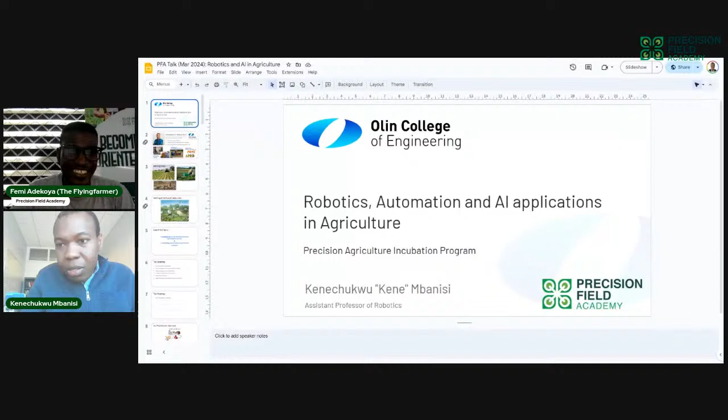It's a pleasure to be with you all. I cannot see who is engaging with this event today, but I guess at some point there might be some interaction. It's a pleasure to be invited to talk about robotics, automation, and AI in agriculture, and I'm very excited to be here. Thank you to Precision Field Academy for the invitation to be here, and to Mr. Femi as well. So I'll start with a brief intro about myself.

As was said in the citation, I am an assistant professor. I teach robotics, I do research in robotics in an engineering school in the US. A bit about my background: I grew up in Lagos, Nigeria. My undergraduate degree was in electrical engineering, and then I came to the US to do my graduate studies, both master's and PhD in robotics, and that has sort of shaped the direction of the work that I do since.

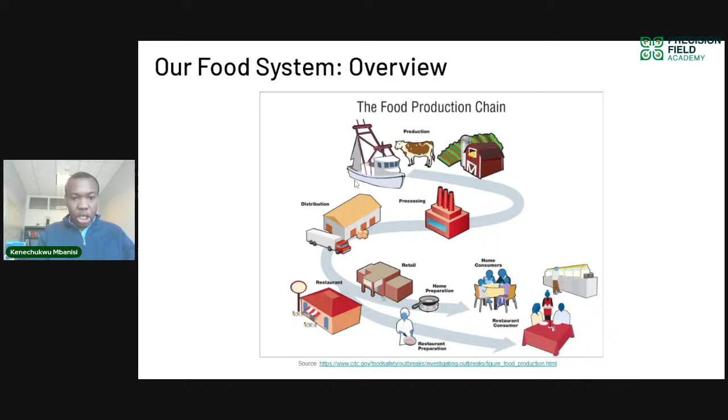All right, so we'll start with the first one, an overview of our food systems. This is a really good image that captures that. Hopefully this is not new to most people, but there are a couple of stages in our food system value chain. There's production, this could be livestock, fishing, or crops, and that is where food is generated. This is grown, harvested, caught, and then processed in some way. Different kinds of foods get processed in different ways. After processing, it is maybe potentially packaged into some form, and then it goes into distribution. Through distribution, it gets sold in a retail store, for example, that gets into your home. Hopefully most of you are eating today, so this is probably how the food came to you. Or you could go to a restaurant and have it prepared in a different approach. All right, so that's all interesting.

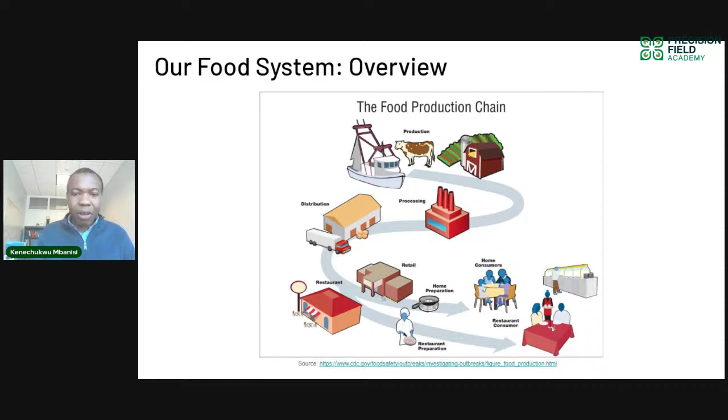I would like to make this more concrete with a personal example, an example of poundo yam and egusi soup, which is my favorite food personally. In particular, I'm using the Ayoola poundo yam example. We eat this food, I eat this food fairly regularly. Maybe some of you might be familiar with this kind of dish. How does this food get to our table?

So I can take this initial map and map it to this concrete example: food production. We grow yam, there's an example of a yam farm, and we harvest the yam, and then this yam is aggregated by different agricultural aggregators. This food is processed. In particular, for the Ayoola poundo yam, it needs to be processed, so it goes through multiple stages of processing, and then it is put through a distribution system. I'm in the US, so I buy this from a store that imported it from Nigeria. Then we buy it, take it home, do some preparation, make it, and then consume it. Hopefully this is not new to most of us, but it's important to keep in mind that this is the path from the farm to the table, and there are different ways that technology can impact that process. In particular, I want us to focus on food production, and how technology, robotics, automation, AI can impact food production in particular.

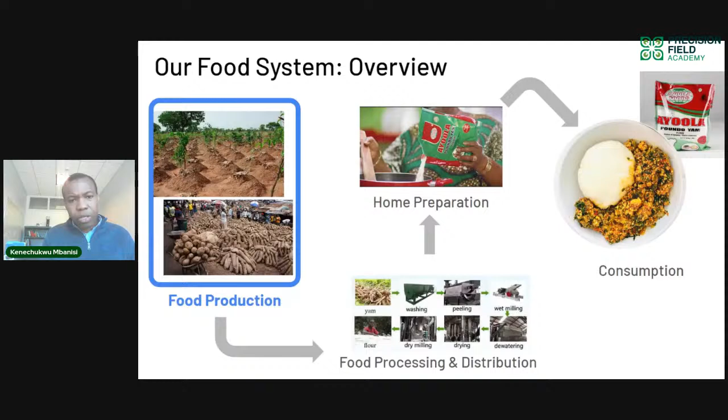All right, so that kind of moves us to the second part. I want us to focus on food production, and maybe in some other avenues you can consider the other stages of the value chain, but we'll focus on food production for this talk. So, open question: what are some of the stages for food production? In particular, maybe crop production. We saw that there's livestock, fisheries, and other approaches, but in particular, crop production. What are some of the stages for food production? All right, I'll move along and present what those are, assuming interaction might be limited because of the platform we're using. But usually when I teach in my school, I try to make sure I'm getting students or people listening to engage, and that helps with the learning process, so people are less passive but more active in their engagement.

But I'll move on. So there's this interesting cycle of how we produce our food, with interaction with the land. When we're doing cropping, we're doing farming, we have this interaction with the land where we go through cycles of engagement with the land to produce food.

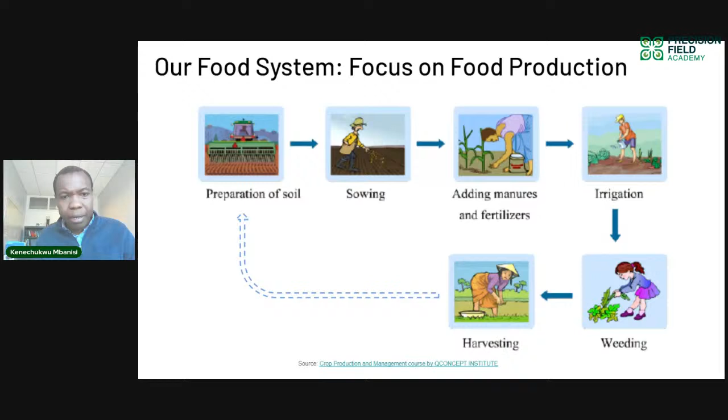That gives us a background of food production, and I'm going to circle back to that background once we start talking about application domains and how robotics can serve in all of those different stages of food production. But for now, I want to highlight why we are thinking about automating or applying robotics to that food production cycle. It's an important question - why is that the case?

Again, I was hoping that we could get some back and forth, but I'll move on, and hopefully we can achieve that a bit more toward the end. But there are a few reasons I would like to highlight for us.

The first reason is global labor shortages. This is a particular concern with countries in the West - in the U.S. and in Europe. This graph you can see from the World Bank shows the global share of workers in agriculture has continued to decline for decades. What that means is that you have fewer and fewer people on the farms to perform the different farming activities that are required.

So, for example, people to handle driving of tractors, people to handle seeding and planting, people to handle weeding, people to handle harvesting especially, and everything within the farming, the crop production cycle. We need people, and the pool of people that can do that is reducing continuously.

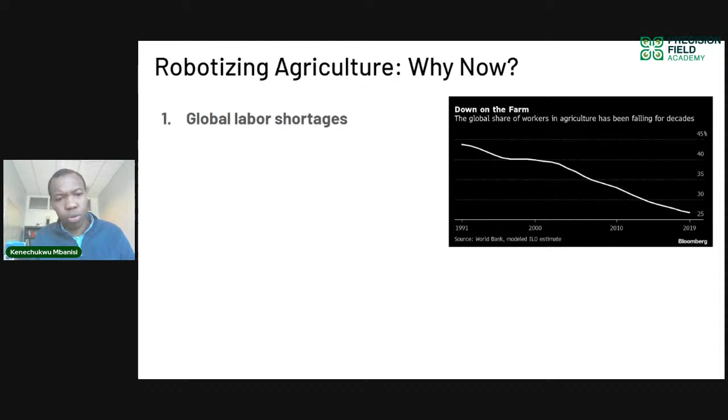The second reason why people are looking to robotics and automation in agriculture is to try to apply these technologies to mitigate the adverse impact of climate change. These impacts include more frequent adverse weather conditions - it might be droughts, where there's lack of sufficient water, or flooding, which is too much water, that unsettles the balance of conditions that you need for your crops to thrive.

In this image I'm showing here, you can see that when you look at the regions of the world most impacted by climate change effects, it's those just around sub-Saharan Africa, within the equator line, and not just in Africa, but also across the world. So it's something that, especially in Africa, we should be concerned about - how can we become more resilient to the adverse effects of climate change in our farming and agricultural practices?

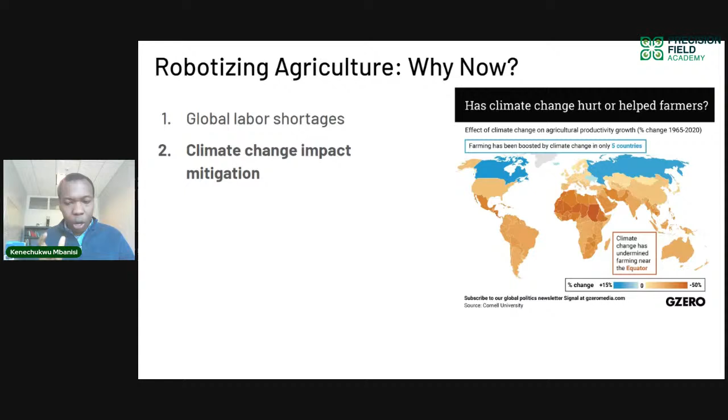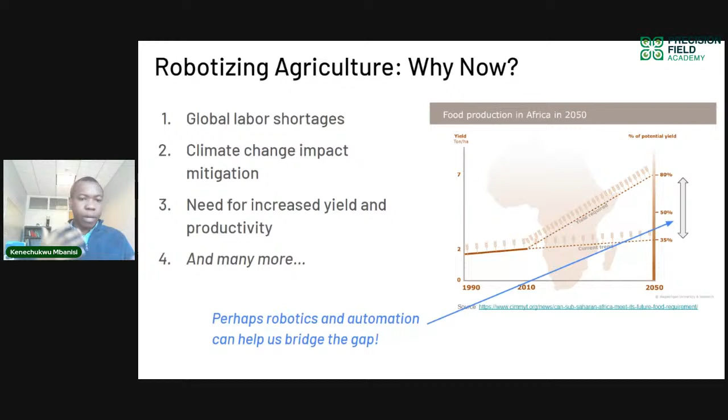Okay, so these are the 3 primary things that are on my mind and in the general discourse. I'd be curious to hear what other people have in mind about some of the things driving applications of robotics in agriculture, but maybe that will come up as more people engage through the chat.

I had a comment about how do we respond. In particular, can we develop digital skills and competencies and connect those to finding opportunities that align with our interests, specifically in technology for agriculture? I want to give a shout out to Precision Field Academy for this opportunity to train people to develop those digital skills and hopefully link them with opportunities that allow them to be change makers - we all need to contribute to addressing this food gap, this food deficit that continues to grow, and we need to lock arms to address the challenges.

Okay, so we've covered an overview of our food system - hopefully that was interesting to you. And then we outlined some of the driving factors for automation and robotics in agriculture.

Now I want to introduce some of the fundamental robotics technologies. This particular section of my talk will focus on robotics in particular, a little bit of AI - particularly robotics and AI, maybe a little less of automation more broadly. All those things are interconnected in some ways, but strictly speaking, we'll focus more on robotics.

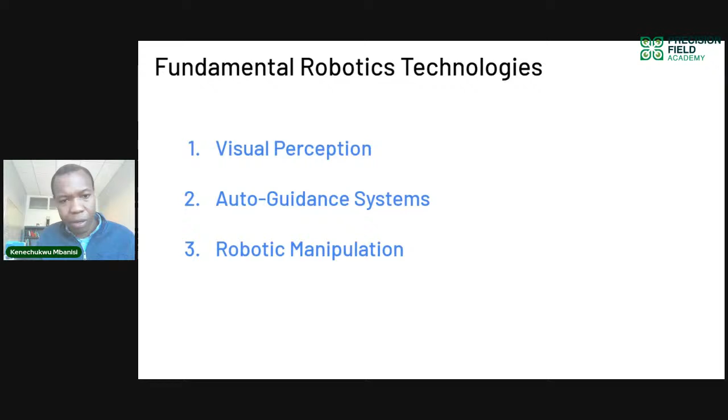All right, so the first is visual perception - it's also called computer vision. Essentially, how do you get a computer or a machine to not only acquire visual information about the world, but process this information in a way that provides it with reasoning about the world. So that's the perception part.

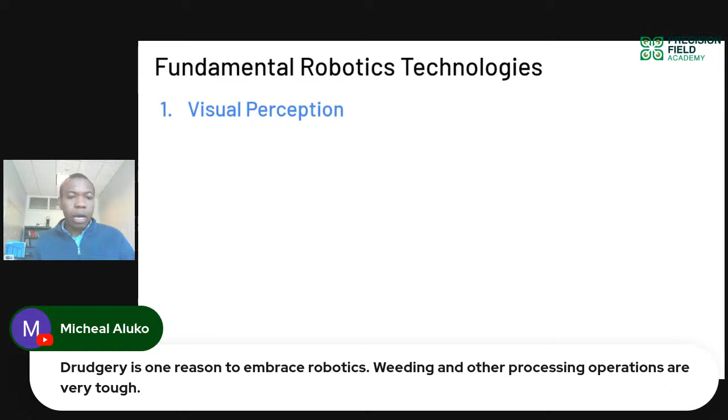God has made animals and humans to have these naturally - we have eyeballs, we have brains. Our eyes capture visual information, our brains process that information to give us inference about what we're seeing. And then as engineers, we try to recreate this visual faculty with machines, so machines can process information. It's very important - farming is a very visual thing. You need to see things to be able to act upon it, and that's why visual perception is very important.

Okay, so I have a few videos just showing you different applications of how visual perception is applied. I'm going to review and just give you some ideas.

On the left, the video is performing crop yield estimation. You're using a camera on a drone to fly through a pumpkin farm, and it's able to distinguish between the white pumpkins that are maybe not yet ripe and the orange ones that are ripe, and count to get a sense of what the harvest could look like. What is the yield?

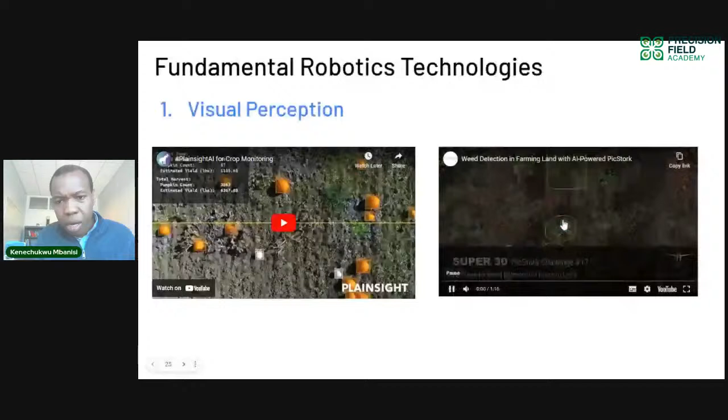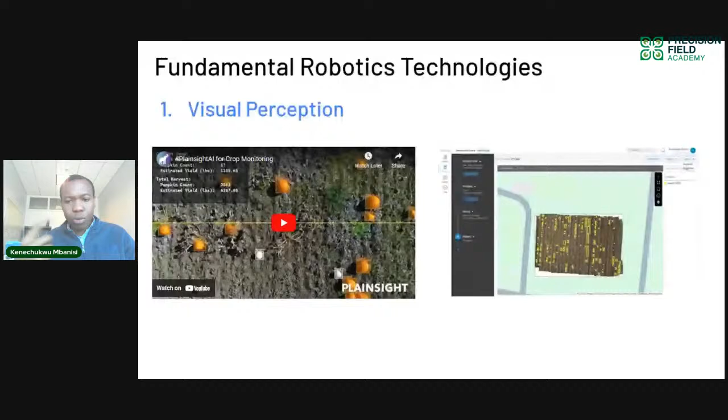And then on this side, this is showing a video of aerial images from a drone over a field, and using computer vision, we can detect different crops, distinguish crops from weeds, and classify what types of crops and what types of weeds, which allows you to have information about how to go about doing your weeding. So these are all visual information being processed by some system to enable us to make decisions like a human being would about our farming practice.

Okay, so how does this happen? There are two stages. The first stage is image acquisition - essentially, how do we enable computers to collect visual information?

This is usually done through digital image formation. Light rays that go from an object go through a process, including focus using a lens, impressing the information on some kind of light-sensing system that collects that information from the light rays and digitizes it. Ultimately, it's going from an object into light into a 2D image on the back end of your camera. This could be a film-based camera, or it could also be a digital camera like we usually use nowadays. That's what you can see in this pipeline.

It's primarily very similar to how our visual faculty works as human beings as well. Light goes in through our eyes. We have a lens, we have a retina. The light falls on the back of our eye, where we have special neurons that have the capacity to interpret light rays - a very similar structure. But anyways, the point is that from a digital perspective, we can generate digital images through light, through special lenses and sensors.

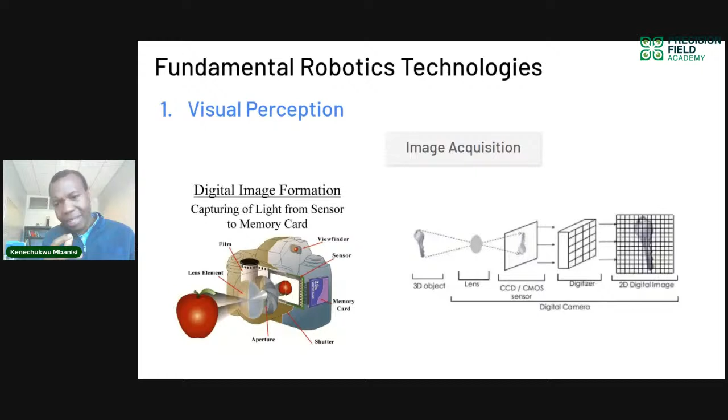Now once we have an image, maybe from a camera, we need to process that image. There are different computer vision pipelines. There's a traditional pipeline that uses more traditional image processing tools and techniques, and then we can set different kinds of classifiers to define what we want to do. So we collect our image, process it somehow, maybe to extract particular information, and then use machine learning to determine whether this is a weed or whether this is a crop, for example.

And then more recently, with the advent of deep learning in the past maybe one or two decades, the deep learning pipeline has become a lot more prominent. In general, deep learning networks allow a machine to learn almost everything you might have needed to do previously through the traditional pipeline. It can learn the features you're looking for in an image, how to distinguish that at different levels, and then how to classify - to tell, oh this is a weed, or this is a crop, or this is a goat, or this is a cow, or how to segment different parts of a particular image. So these are the two different pipelines.

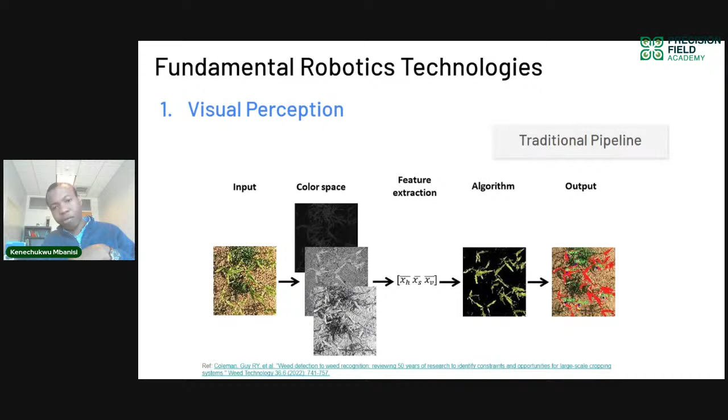One thing I wanted to add is expanding the visual spectrum. Usually when we think about cameras, we think of the traditional RGB, or the three color space, the three bands, but there are other approaches of collecting more data from our visible world through multispectral and hyperspectral imaging. That way we are collecting multiple samples of wavelengths from our visual spectrum that we are perceiving, and we can actually study and understand more granular things about the world, particularly about our plant or our crop or our fruit - we can tell more important things beyond just the RGB colors.

As human beings, we apply a lot from our RGB, but then going beyond RGB to higher spectrums, or higher resolution of our spectra, we can actually get much more information.

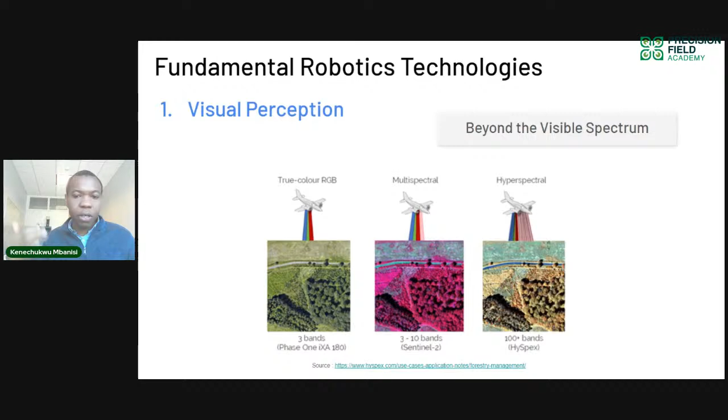So that's for visual perception. The second fundamental technology is on auto-guidance systems. I have this video to show you.

It was really exciting the first time I got to take the autonomous tractor to the field, swipe my phone, watch the tractor start.

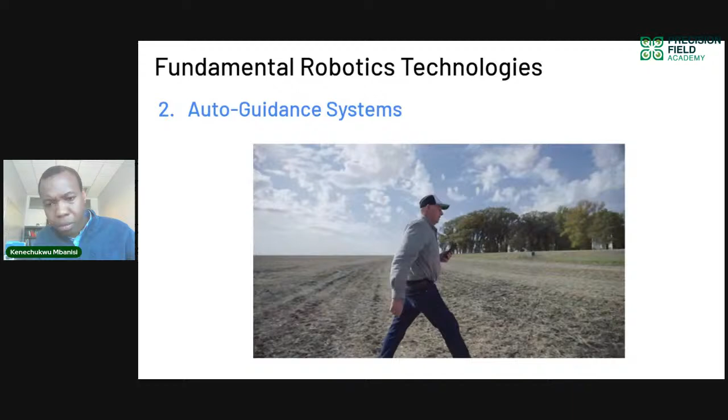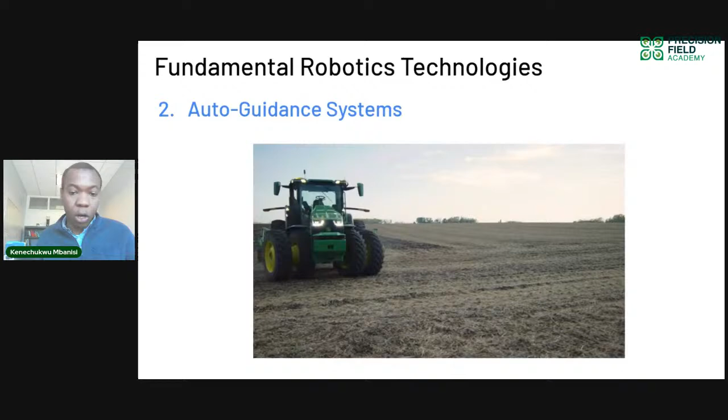This is showing a John Deere tractor. It's an autonomous tractor. John Deere is a popular tractor manufacturer globally, probably the largest in the world. Within the last 5-10 years, it's really been investing a lot in autonomous tractors, enabling a tractor to not need to be driven by a farmer or driver, allowing it to drive autonomously, performing different farming tasks on the land.

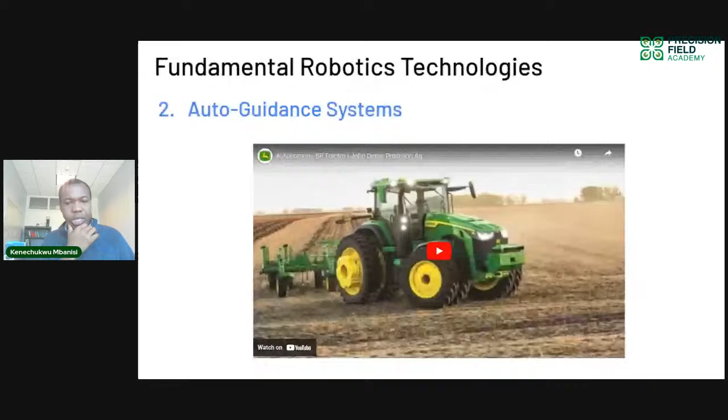So the question is, how is this enabled? What kind of fundamental concepts enable us to have a tractor that does not need to be driven by a farmer? This is an interesting block diagram. It shows the main components. Fundamentally, at the core, there is control - you're interpreting sensing information and determining how to steer and how to move.

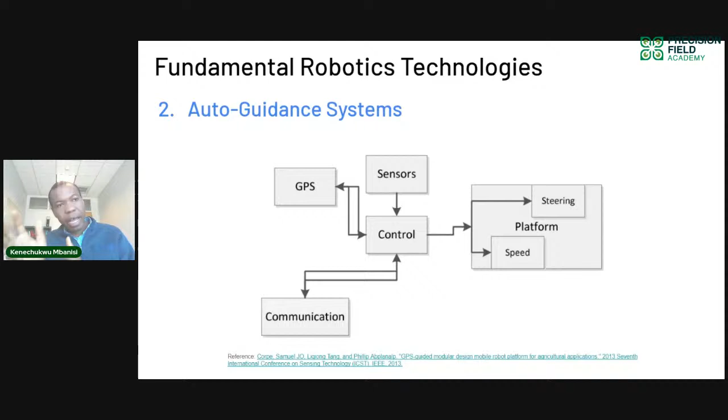The control system for an autonomous vehicle is very similar to the control system of a driver. The driver uses its sensors to know where it is within the farm, where it wants to go, communicating with other people or components of the farming practice, then steering or using the different pedals on the tractor to control the vehicle's movement. That's very similar to how a robot would do it - it processes sensor information, GPS or other sensors, calculates where it should go, plans a path, and ultimately sends steering and speed commands to the engine of the vehicle.

A lot of this has existed for many years, but what really unlocked the capability of auto guidance in farming is GPS - how it became more mature and more accessible. That really enables precise positioning. I know there have been other talks about satellite navigation systems in this incubation program, so I won't delve too much into this, but using GPS, the Global Positioning System - the US version, more generally called Global Navigation Satellite Systems - enables you to get significant accuracy of your geolocation anywhere on the Earth's surface.

When we include other measures of correction to general GPS information, we can get better levels of accuracy. In that John Deere tractor video, with the right type of GPS system, they can get centimeter-level accuracy of where the tractor is at every moment in time. If you know where you are and have a mapping of where you want to be, it's fairly easy to determine whether to turn left or right to go from where you are to where you want to be. That's fundamentally how auto guidance is enabled.

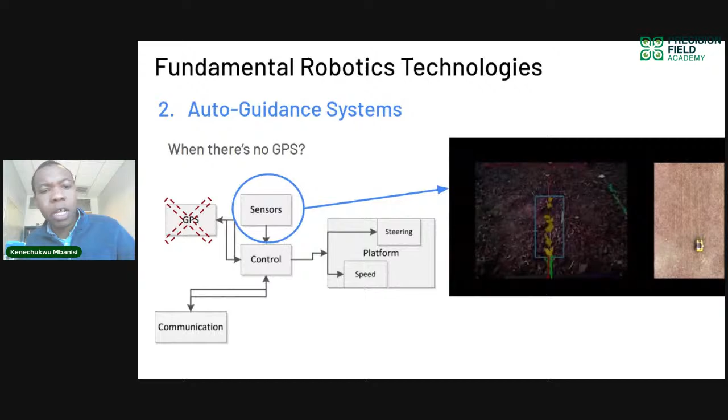But there are also scenarios where you do not have GPS. This usually isn't the case for general agriculture applications, since agriculture is typically outdoors, where you usually have access to GPS. But there might be scenarios with a smaller robot operating under crop canopies, where you might have intermittent access to GPS signals. In those scenarios, how do you provide your localization information? There are approaches using other sensors.

In particular, this example shows using camera information, following the crop row. You can follow crop rows using camera information to stay on the path without needing localization from GPS. That's an interesting application enabling a more robust auto guidance system for farming, where you're no longer dependent on very accurate GPS information all the time. In cases where the GPS signal drops, you can use other sensors like a camera to follow the crop row.

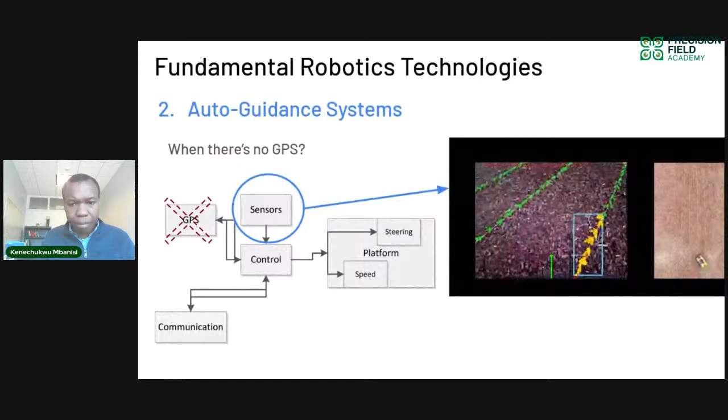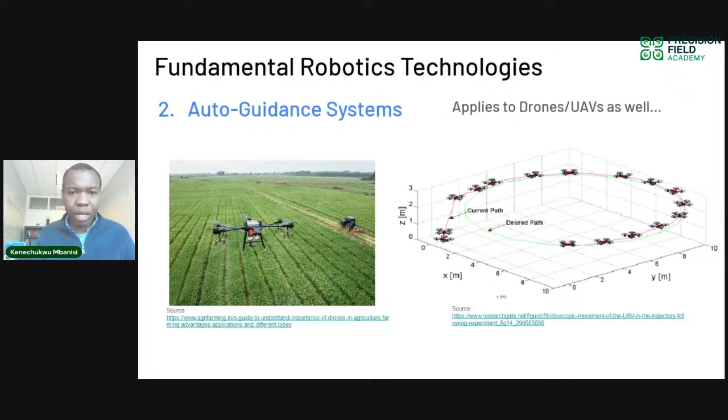All of this also applies to drones and UAVs. Drones have GPS connectivity to enable precise localization, and GPS is usually their primary source of localization. You can plan a path for your drone relying on GPS information, and if it has the right control capabilities, it can follow that path by steering left, right, up, and down, similarly to how a tractor on the ground would do it. To summarize, the auto-guidance system is a very important part of how we enable robot systems to operate on the farm.

The third one is robotic manipulation. Manipulation is how you can interact with crops in this particular case, a lot of times in the space of touching, holding, pulling, pushing, and different kinds of things. I'll show some videos to motivate this.

The other example is a different scenario. Let's watch the video.

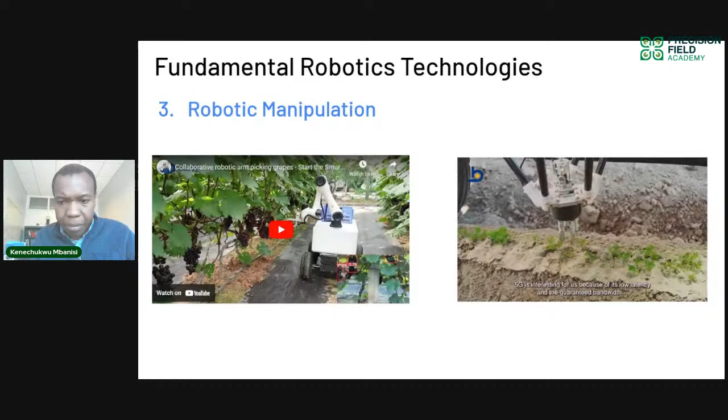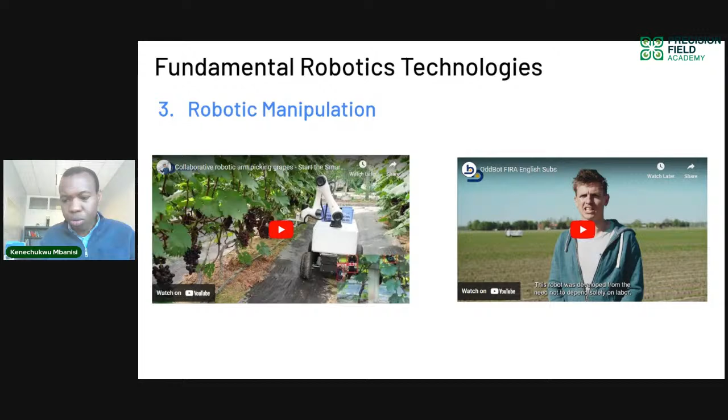This one in particular is using a robot arm for weeding. It has that robot arm that can actually do precise weeding, and I will show more about that later on. In general, manipulation is using robot arms to manipulate your environment, like the two examples I showed with harvesting and weeding.

There are generally two main types of robot manipulators, though there are a few hybrids or mixtures. There's the serial link, where all the different links are serially connected in a kinematic chain, and the parallel link, where they are not connected end to end but are sort of parallel to each other. Usually manipulators also have something we call an end effector, which I'll talk about as well. So these are the two main types of manipulators.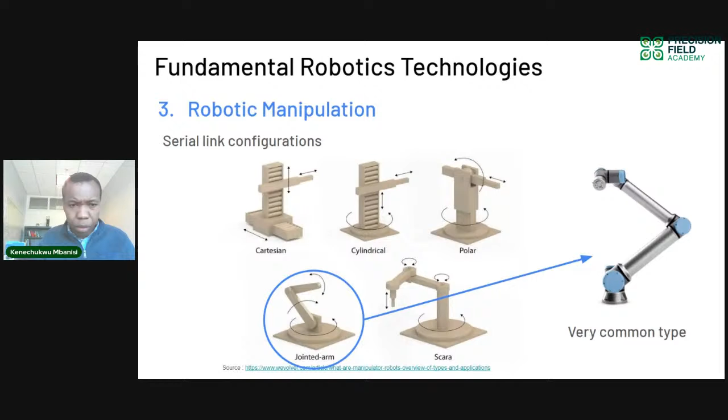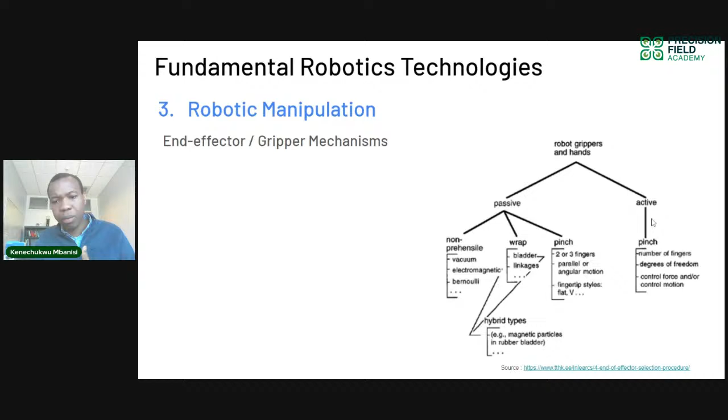The last part of manipulation is the end effector, or the gripper. You can call it end effector, or gripper, it's usually the thing at the end of your robotic manipulator, either the robot arm or the parallel link, the thing that actually does the interaction. There are different forms and types. This shows a taxonomy of different types: active grippers, passive grippers, grippers with multiple fingers like a human hand, and ones that use vacuum.

They're vacuum operated, or they're electromagnetic operated. Some are made with soft material, and some are more rigid. So there are different applications, and usually people design different grippers for their different applications.

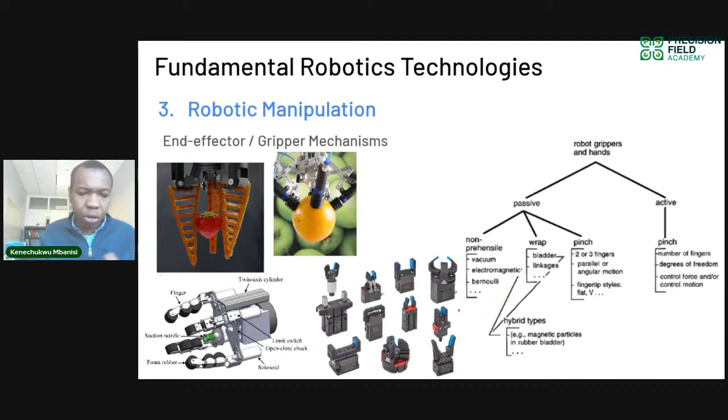Let me go back. So in general, these are the different structures for manipulation. You have both series and parallel links, and then you have end effectors at the end.

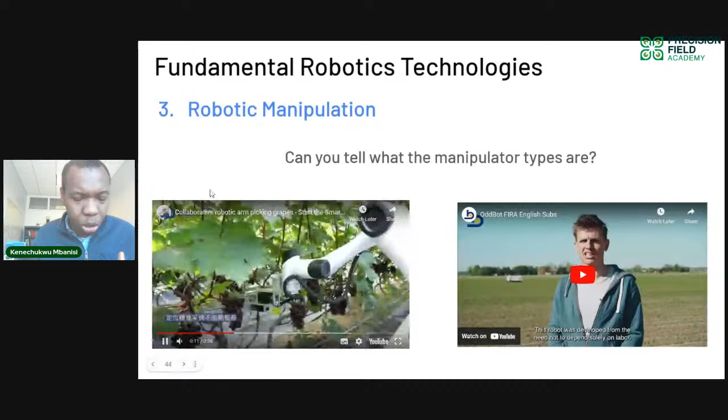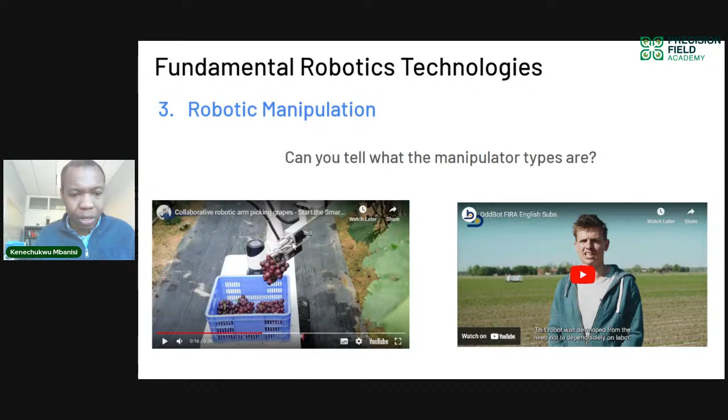I was going to ask people if they could tell what type of manipulator we have in these two videos I showed you earlier. I might skip that, but just think about what it might be. This is a series link manipulator arm, right? And then on the end there, that is the end effector part that is at the end of your manipulator arm.

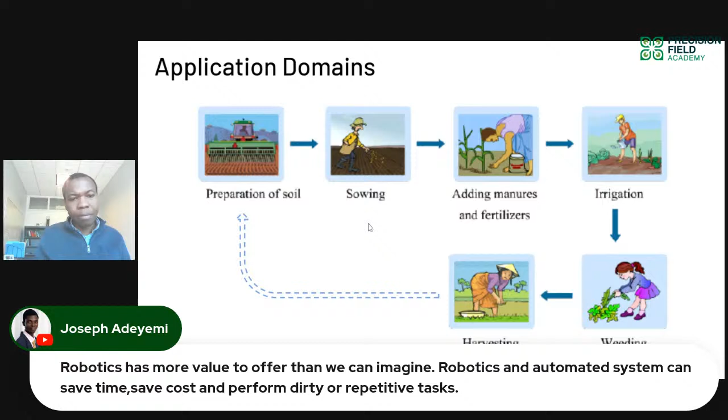How I want to do this is to go through each of the different food production stages I showed you earlier and say, okay, how is robotics applied for each of them? How is robotics applied for preparing the soil? For sowing? For irrigation, for harvesting, and so on? This can get us thinking more broadly about the breadth of robotics applications in farming or food production.

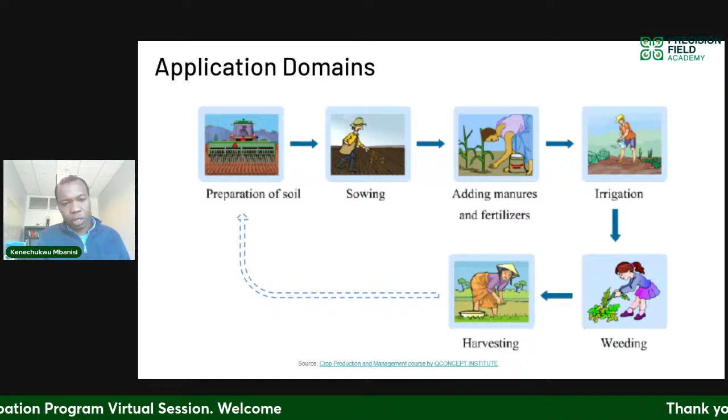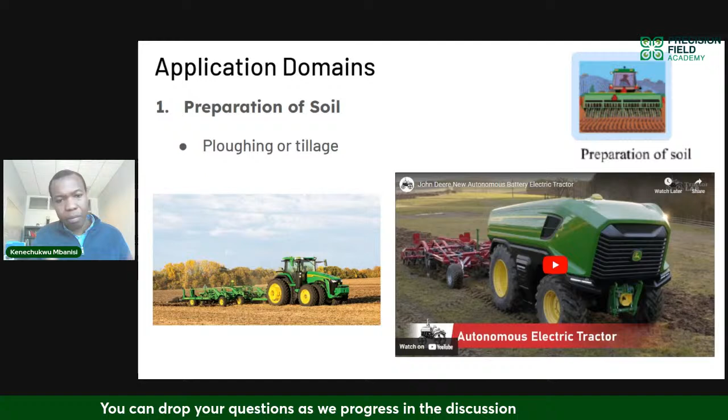You know that in farming, land mass can be huge. In the US, you might have a piece of land that is 5,000 acres, which could take you hours to drive around. So you can use an autonomous vehicle that can do your tillage day and night, allowing you to work more quickly and minimize the impact on labor, especially when there are labor shortages.

The other application is in seeding or sowing. You can think about digging, and also direct seeding as well. This example of a robot manipulator arm shows it actually doing seeding in a nursery or greenhouse scenario, where it is then transplanted to the field afterward.

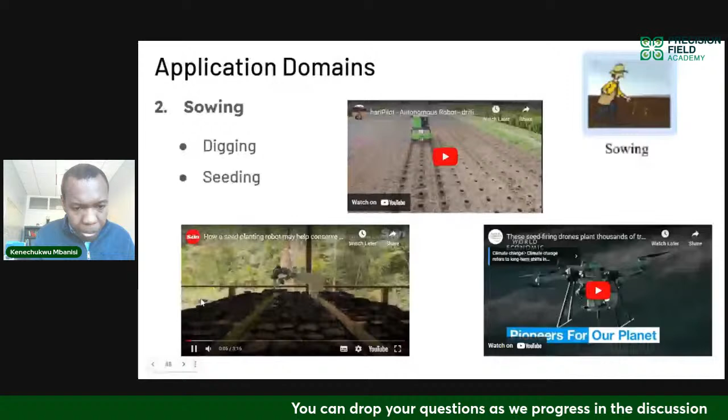It's an interesting video. Let me play it again so we can see the robot, known as Yumi and created by ABB Robotics. It can sow about 600 seeds in a morning's work, the equivalent of 2 football fields in a day.

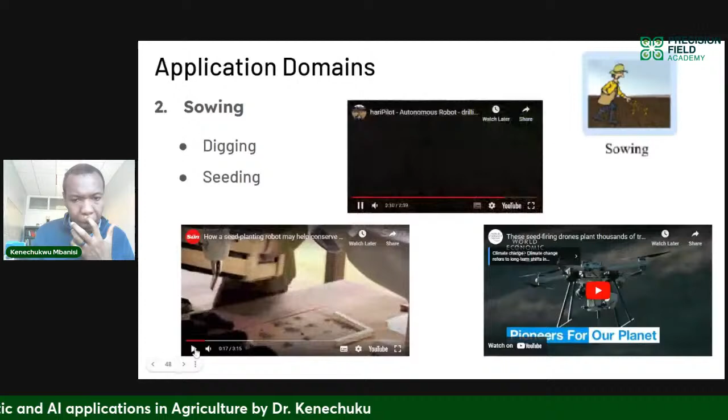This other one is a digging robot used to prepare for seeding or maybe transplanting. The robot just moves around the field and digs holes at the right depth into the ground.

And then the other one, which is really an exciting application of robotics for seeding, is using a drone to do seeding. They have this drone that can... it's a long video, don't have time to show all of it.

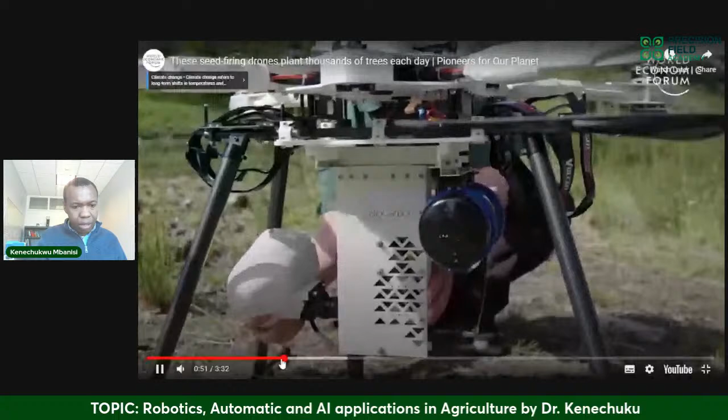Let me see if I can pull up that part again. So we use this drone to fly around, and it has a seed application mechanism at the bottom that shoots seeds into the ground from the air. It's a really interesting application, and you can see how it weaves together visual perception, autonomous guidance systems, and robotic manipulation. Most applications we see are applying these fundamental concepts in different ways.

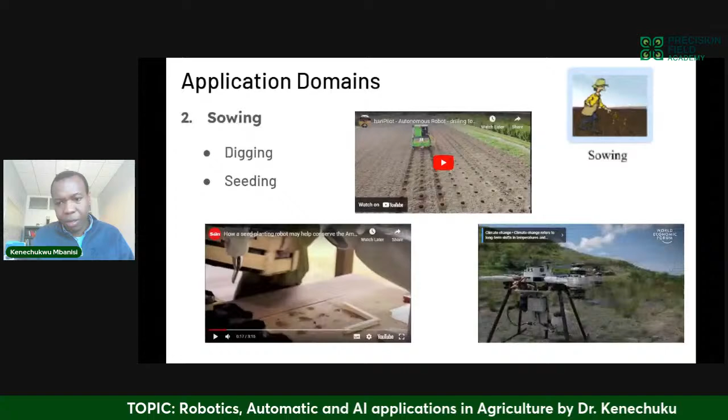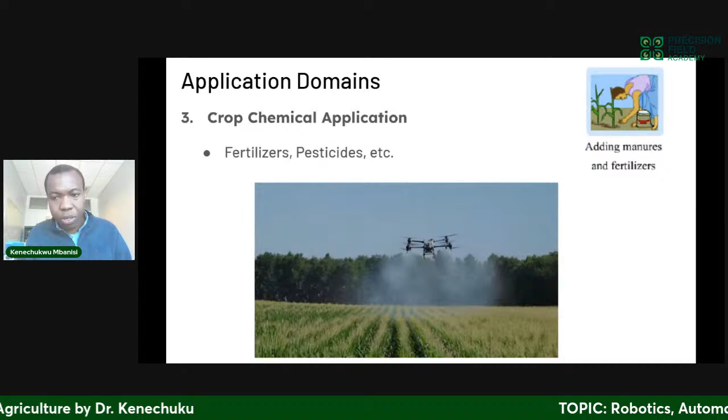And then the other application would be chemical application - fertilizer, pesticides, herbicides, different things. It's very common to use drones for this. I think this is the bread and butter of Mr. Femi's company, Integrated Aerial Precision, using large drones to apply different types of farm chemicals for agriculture, including fertilizer, pesticides, or even irrigation. This is a very common application of using robotics, in particular drones, for crop chemical application.

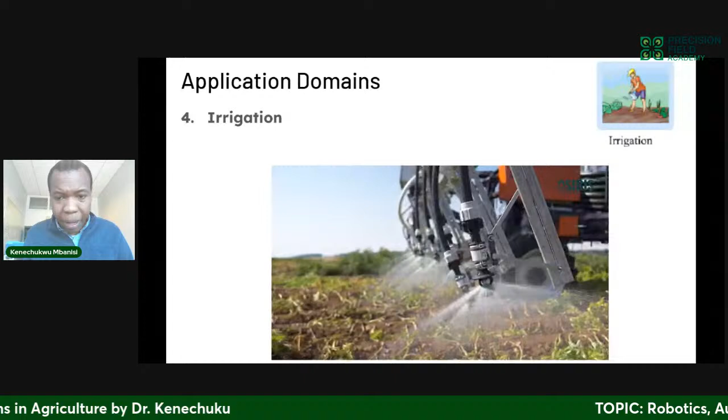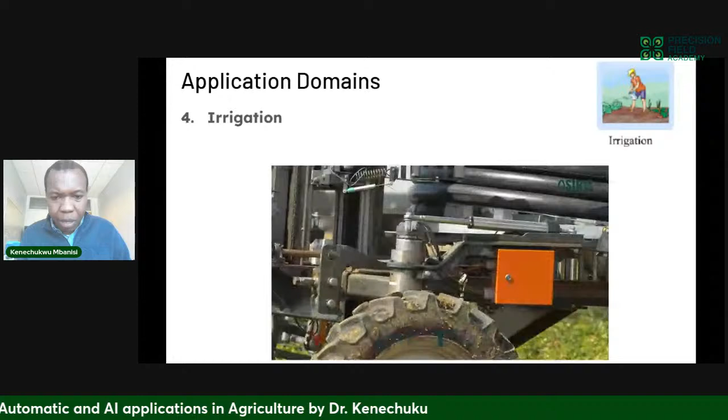Similarly, I wanted to capture irrigation as well. There are different approaches - instead of using a drone, you can also use a ground robot with a similar sprinkler or sprayer system that can move through your farm and apply inputs in different ways. This is a different approach as opposed to something aerial that isn't impacting the ground. This will actually be a ground robot that is also autonomously driven - no one is controlling it, and it's able to do variable rate control, determining what parts need more or less watering, enabled through robotic technology.

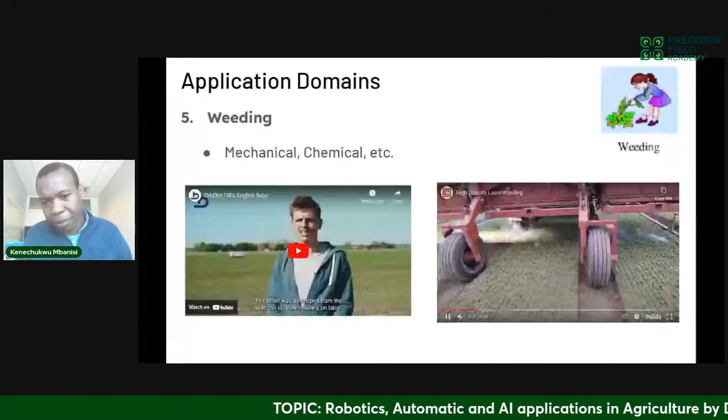And then weeding is an important part. There are different approaches to achieving weeding - mechanical or chemical. In this case, I'm showing a company called Carbon in the US. They don't use mechanical, electrical, or chemical methods - they actually use lasers to kill weeds. So of course they need to be able to tell which is a weed and which is not, and then they can apply very high precision positioning to shoot a laser at the weed. That's a very interesting application.

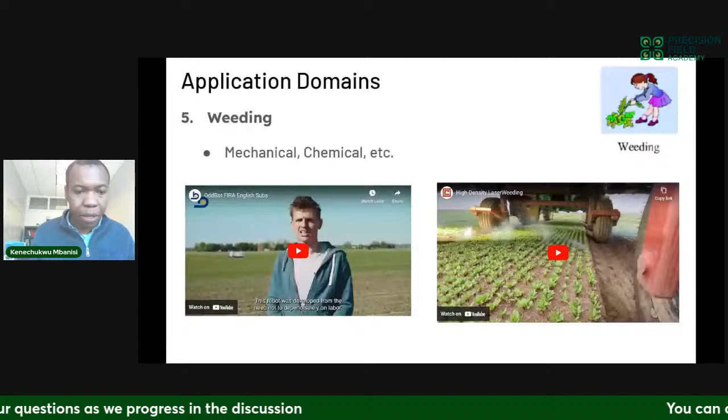This one I think I already showed earlier - that is using a robotic manipulator to pick weeds from the ground.

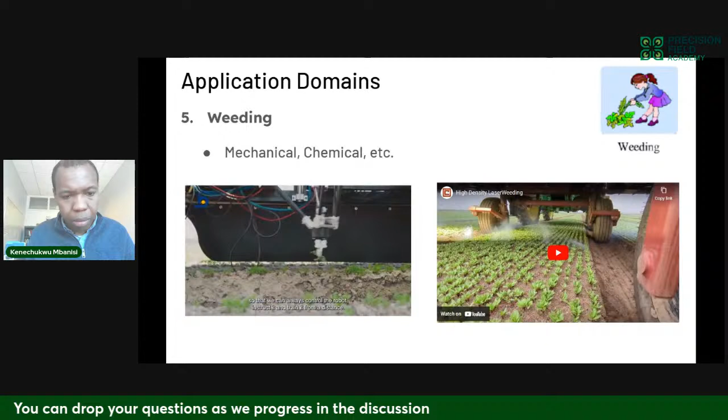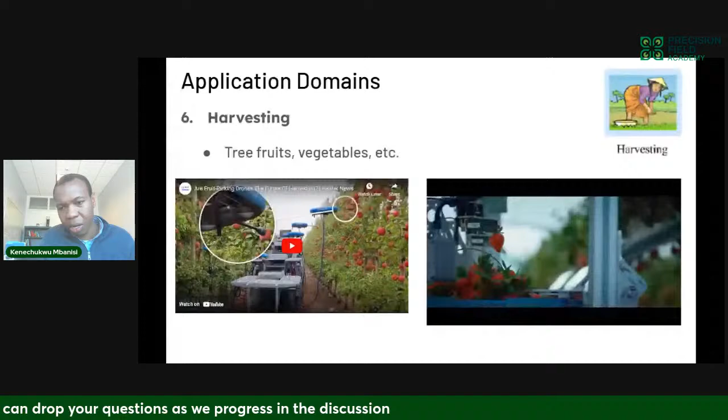And then this is another example, not using a drone but a ground robot, particularly for harvesting strawberries. Strawberries are particularly hard to harvest - they're very small and delicate, and any pressure on the actual fruit can damage it, limiting its commercial value. So people have explored how to use this really intricate robotic system to identify where the stem of the strawberry is, go and hold it by the stem, cut it, and delicately place it in the basket.

All right, so that brings me to the end of most of what I wanted to share with us, and I think we're doing okay on time. The last thing was supposed to be an open discussion, but I think we can mix that into the Q&A if people have questions at this point. I wanted us to discuss what opportunities you're excited about. I've shown different applications, but my goal was not to teach you all about robotics and agriculture - that's not possible in a one hour talk. I wanted to give general ideas of the breadth, expose us to some application domains, and motivate us to think about how what other people are doing might connect to things we're interested in. So now I'm curious to hear from whoever is in the audience: what opportunities are you excited about? What have you seen that makes connections for why, in Africa or wherever you are, we should be considering applying robotics to agriculture?

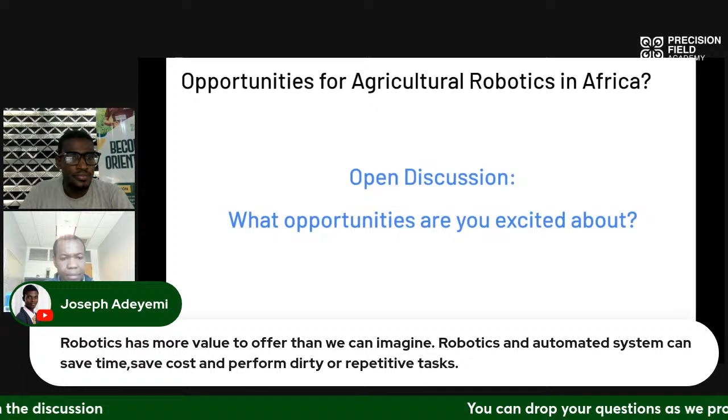So again from Joseph Adeyemi, asking: how do robotics, automation, and AI contribute to reducing environmental impact of farming practices, such as targeted pesticide application and soil health monitoring?

Yeah, that's a great question, but you kind of answered it yourself with those two examples: targeted pesticide application and soil health monitoring. Let me elaborate on those two areas of robotic application. First, with targeted pesticide application - fundamentally, in your field, you might have a large field, maybe 100 acres, maybe 1,000 acres, with tons of produce. One way to think about your field is that it's a homogeneous space where everything is the same, but that's not actually the case. Some patches of your field might require more or less inputs than other parts - some parts might be dry and require more irrigation, some parts might require more fertilizer because of soil context, some parts might require more of this or that. If we can unlock that information at a large scale, we can be more strategic in how we apply our farming inputs.

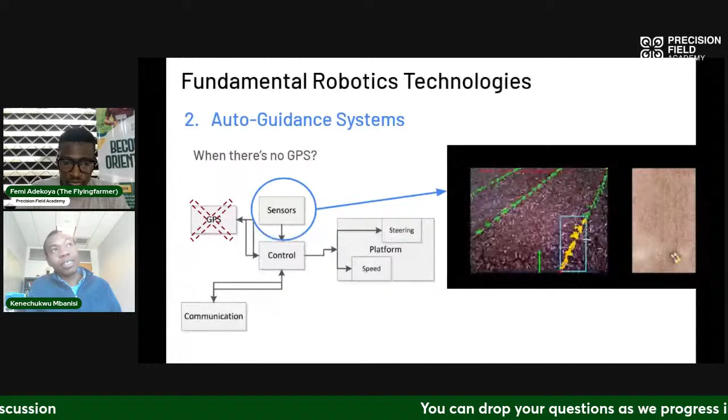Other technologies could use what's called visual odometry — essentially using your camera feed to get a sense of how you're moving in space, whether you're moving left or right, and roughly how fast. If you know your origin location, you can use that to estimate where you've been since that known location. But these techniques are prone to drift and errors, so people usually use them as a stopgap for when you lose GPS or GNSS signal, not entirely on their own. I don't know of scenarios where people on a farm would completely disregard GPS and use other methods, because GPS is really reliable on the farm in most cases.

No field — right, yeah. Because there are some agricultural applications that aren't on the open field, where you have that direct satellite connection, compared to an indoor environment, like protected area cultivation, maybe inside a warehouse or something indoor and enclosed, where we need a robot to get inside and just work. Yes, maybe for example in a greenhouse — I think greenhouse is probably the most common example of an indoor scenario, or places that are more enclosed. That's true, that's a good one. I think that when you're indoors, it presupposes that you're in a more controlled environment.

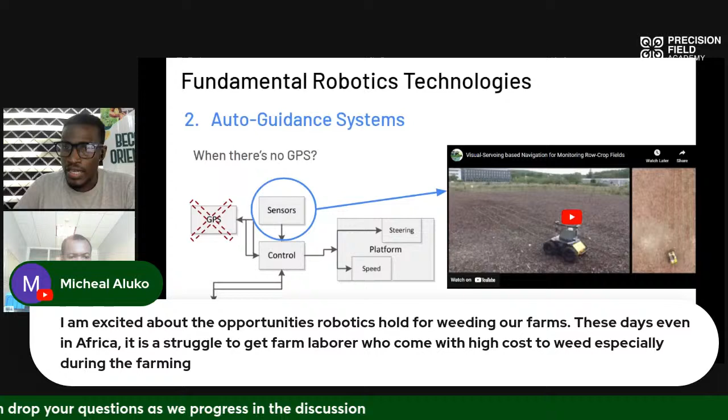Okay, I'll move to the next question, and I think this is very critical. From Adejoko Tose: most precision and robotic farming is crop-based and less focused on livestock, apart from digital fencing and artificial insemination. What else adheres to robotics and precision in livestock production? I'd like to hear from you—I also have a comment. Yeah, that's a very good question.

I really can't say I know very much about livestock production, so I'll probably defer to you, Mr. Femi, about this. The few comments I can provide are that yes, I have seen a few applications that may go beyond digital fencing and insemination.

For example, people have used different computer vision techniques to monitor livestock, maybe chicken or poultry or cattle or swine, to monitor their movement and growth using camera information that you can process to count or study changes in the livestock. So there are some applications of using camera information to harvest data that might be useful to inform certain decisions.

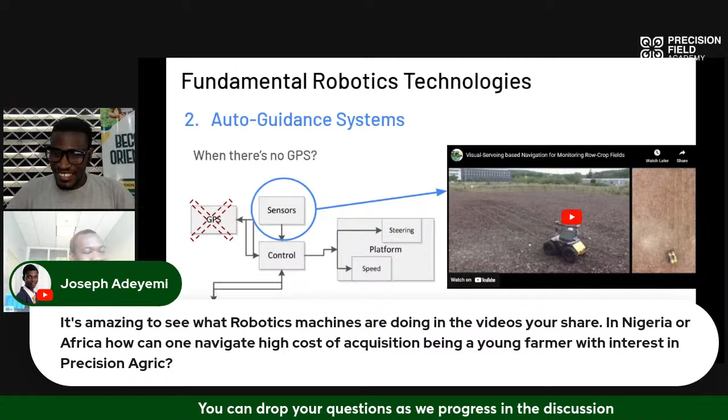This is the last statement: if GPS is a must in robotics, what happens when it's to be used in livestock? I think I've actually asked this question, but he just made it practical, from a practical perspective. Dr. Kenny, I think you want to comment on that, because robotics is not only about GNSS or GPS. It's not only about that.

GPS or GNSS is not a must in robotics. Maybe to qualify my understanding of your comment, is GPS a must for auto guidance systems? Because robotics is broader than just the guidance you need through GPS. You don't need to rely only on GPS. GPS is entirely unavailable indoors, and there are many scenarios where you need to do things indoors. So there are other ways, as we touched on earlier, of enabling localization or positioning of your system indoors where there's no access to GPS. That would be a scenario like you said, with livestock or poultry or whatnot—there are other ways to enable positioning without GPS.

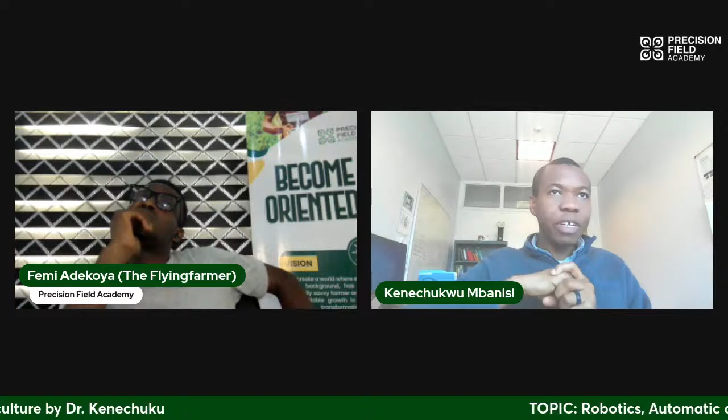And what you will find is as you develop more competency - my vision and my intuition about what I showed at the beginning of the talk, what will farming of the future be, in 2050, 2060, 2040 - my belief is that the application of technology will continue to rise in this field, not only because technology is becoming vastly more accessible, but also because we really need more yield and productivity, especially in Africa. So there will be more interest, more funding, more opportunities in making the connection between agriculture, production, and technology - AI, robotics, IoT, and smart technologies.

So this is the season of humble beginnings, and what you want to do is be persistent, be focused, so that you build crucial competencies that will allow you to reap benefits in 5 years, 10 years, when some of these opportunities continue to expand. So I just encourage you to make the most of Precision Field Academy and all the great things there - all the great speakers, all the great resources available. Make the very most of them.

Make the most of the mentorship by Mr. Femi, who's a pioneer in this space in Nigeria. I wish everyone all the best. It's been a pleasure being here and sharing the little that I know in this space, and hopefully that helps to spark people's thoughts.

Yes, it does. Thank you so much again, Dr. Kenechuku. I wanted to say, after this talk and questions, can you give us your last words, advice and all that before you leave? I think you've already done that. I think I did, yes, already jumped the gun on that.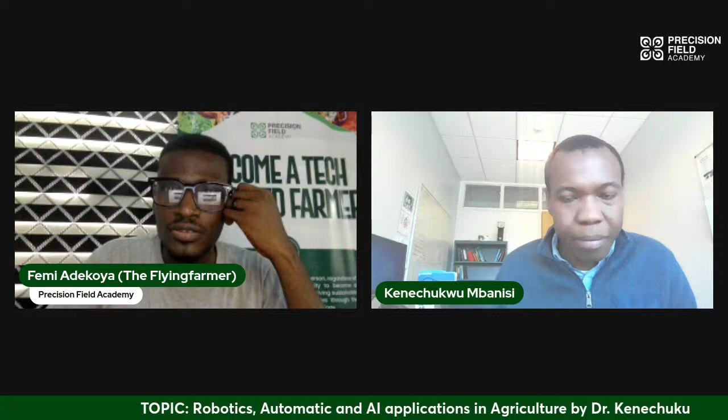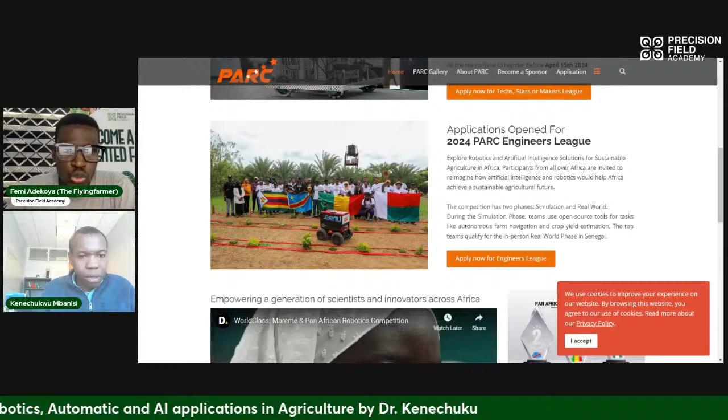All right, so that's my last word. Mr. Femi, I cannot hear you any longer. Mr. Femi, I can't hear you any longer. Hello? Hello, hello. Oh. Hello? Yeah, I'm actually Okay. happy for you to, I mean, seeing that you're actually sharing with the whole. This is actually what we need. Mm. Okay. I think I can hear you. There is the signal is not Can very. you hear me now? Yes, I can hear you. I think there's a lot of, it's breaking a lot. It's intermittent, but Yeah. Okay. Can you hear me now? yes, I can hear you. I can hear. There's a delay, but I think I can hear you. Oh my Yes. God. I think you should be able to hear me now. Yes, I can hear you. Yes. Can't hear you anymore though. Mr. Femi, I can't hear you. Hello, Mr. Femi. Audio is Okay. not. Yeah. Can you hear me? Okay, it is coming through now. Yes.

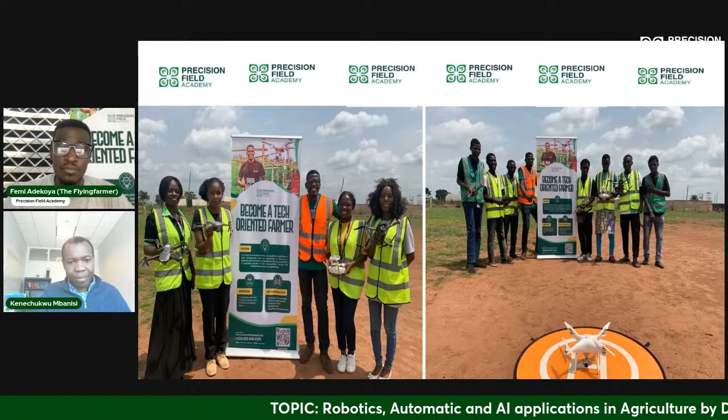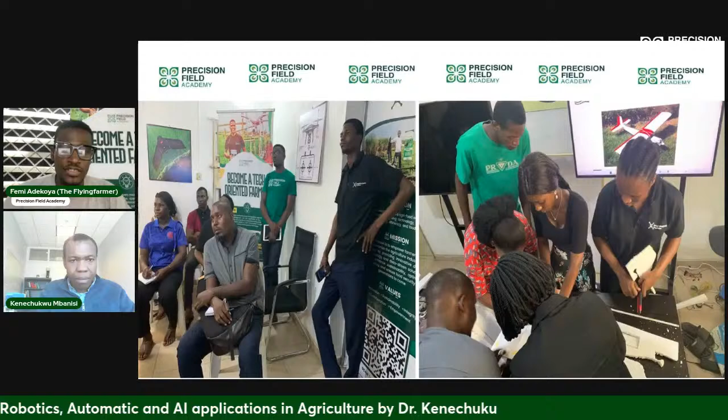Guys, we're coming to the end of this session for today. Tomorrow there are practicals already, including aircraft modeling, part of robotics, aerial robots, and drone training. We've taught you the basics of drone maneuvers and how to operate the drone professionally, considering risks and all of this. Tomorrow we'll take it further, and I believe you'll be able to see what Dr. Kenechukwu taught us today in action. We'll be doing autonomous operation for mapping and data collection, in particular how the navigation system, GNSS, guides our drone on a flight plan or path to collect accurate data with precision and best efficiency. So don't miss that tomorrow if you're on the usual site for us to meet, at 9 a.m. sharp for respective locations. It's the weekend, but it's what we do.